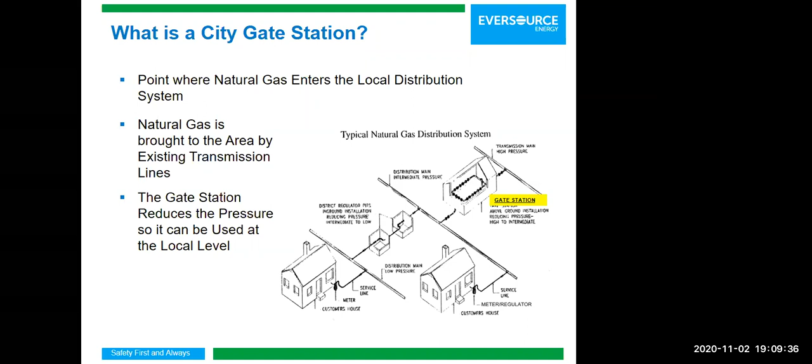If you paid attention closely, you would have heard me mention a distribution system. I'm happy to report that earlier this year, we got approval and support to install over 2.5 miles of 12-inch distribution pipeline from Main Street and Gilmore Drive to Douglas Road and Fletcher, just south of Meadow Pond, before the bridge.

I'm also happy to report that we've completed almost 50% of that project. Next slide, please.

Just to summarize, it is our intent to install a new city gate station, and we're also working on installing over 2.5 miles of 12-inch distribution main. So what values are these two major projects going to add to the area?

Number one, when we install the new city gate station, it improves the pressure in our distribution system. That way we are able to support the local customers in the area, which is a service we're always happy to continue providing. By completing this project, we are able to better serve our customers.

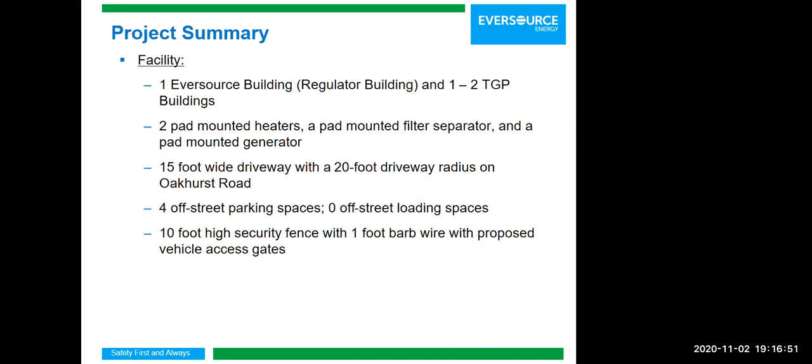There'll be a 15-foot wide access driveway with access off of Oakhurst Road. Inside the site, there'll be 4 off-street parking spots, and the perimeter of the site will be surrounded with a 10-foot tall security fence with 1 foot of barbed wire on top of that. Next slide, please.

This is our general arrangement plan for the site. You can see the driveway off of Oakhurst Road. The site is entirely contained within a 120-foot by 100-foot area. You can see on the plan also the setbacks, and the entire fenced-in area is within or outside of those setbacks: 20 feet on the east and west sides, and 50 feet on the front of the site.

On the eastern side of the site, there's a proposed property line that's now an existing property line. It's tough to see on the PowerPoint, but Eversource recently entered into a land swap deal with the parcel owners to the right for the solar project. I believe it was to accommodate some setback issues they were having. We adjusted the property line, and that's now an existing property line. We'll get that onto the plans as one of the changes, and we'll continue to number for that.

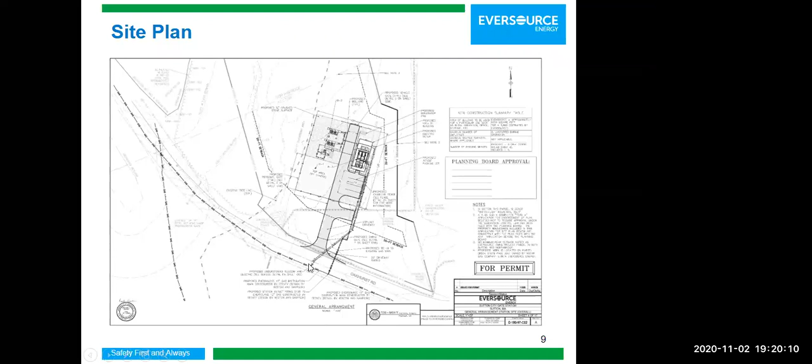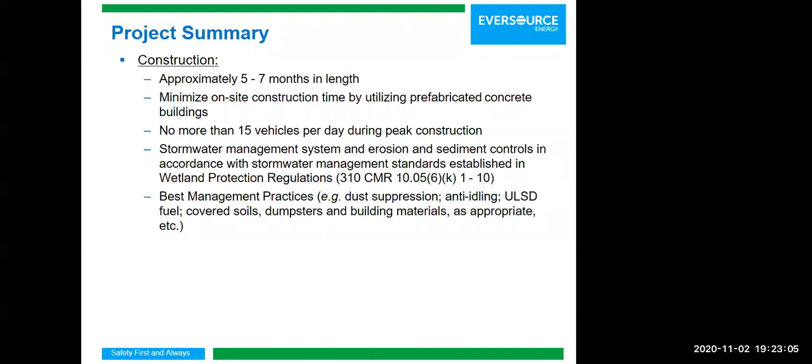The site will be unstaffed, only one vehicle trip per week for routine operation. As we discussed earlier, the exterior mounted lights at each door will be activated by switch or by photocell, something that was just recently clarified.

Essentially a photocell works by reading the outside light intensity, so it'll turn on at nighttime or at dusk and beyond throughout the night. That'll also have an override if Eversource elects to not have the light on. But the lights are very focused.

The photometric plan that we had done shows that at about 15 feet away, there's only one foot candle of intensity, which is similar to twilight hours.

The permanent stormwater management plan is based on a pre-treatment vegetated filter strip, along with an infiltration trench to take advantage of some of the well infiltrated soils that we have on the site. We also have a landscape plan for year-round screening of these.

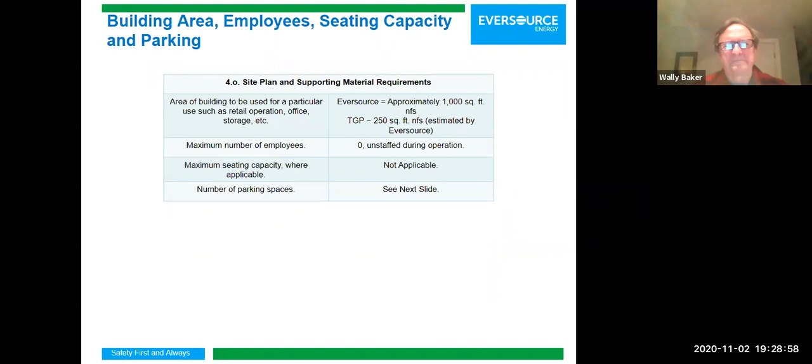Building area, employees, seating capacity, and parking. The area of the Eversource building, at about 48 by 21, is 1,000 square feet. Our best estimate right now is that the TGP buildings will take up about 250 square feet. As mentioned before, there are no employees.

It's unstaffed during operation. Seating capacity is not applicable. And we've proposed 4 parking spaces, which Tricia will address additionally in the next slide.

Okay, so as part of the site plan approval application, we've looked at the zoning bylaw and the tables there that specify the dimensions and requirements. There is 1 space per 1,000 square feet of net floor space.

We're proposing 4 spaces for parking. We're estimating about 1,000 square feet of net floor space for Eversource and about 250 square feet of net floor space for the TGP facility, which will be either in 1 building or 2 buildings as mentioned previously.

We are not proposing any off-street loading spaces, and we filed a waiver request on October 29th for no off-street loading spaces. We believe no off-street loading spaces are needed during operation because the facility will not receive regular deliveries of either equipment or materials. The off-street loading space would increase the impervious area unnecessarily, and it would not adversely impact the public interest or any natural resources.

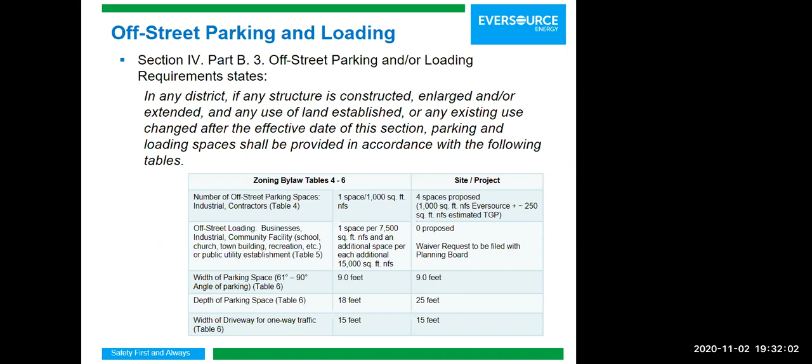So Jen, if you want to go to the next slide. I think I probably just covered this - this is again the request for the waiver to the off-street loading space that we just talked about. So you can jump to the next slide.

So we did do an assessment of the permits and approvals that would be required from the town. We are here today with you for the site plan review approval. We filed our application October 7th. We did file some response to comments from the planning director, Jennifer Hager, on October 29th, as well as the Board of Assessor comments, also filed October 29th. We are in receipt of Graves Engineering comments on the application, received those on October 29th, and we're still in the process of responding to those; we will provide written responses to the Graves Engineering comments.

We did file a wetlands notice of intent with the Conservation Commission. The first hearing was held on October 21st. That hearing is continued - the Conservation Commission is interested in seeing what the planning board's comments are on the project, so it's continued to their next regularly scheduled meeting, which I believe is this coming Wednesday. We will be filing a driveway permit application, a building permit application, and an application for a road opening permit as well. So that summarizes the applications filed or to be filed with the town.

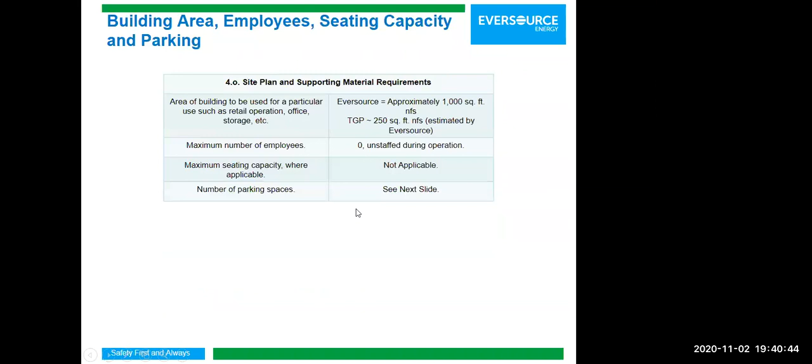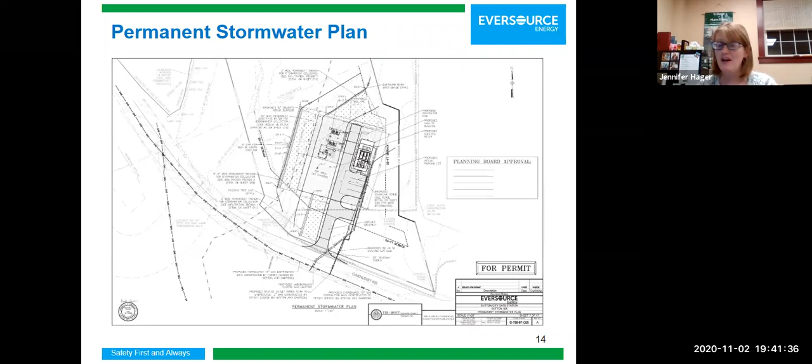So it's just cleaner and clearer now, you can see where that is. All right, great, so that's nice and clear. Can you talk about water supply, why you do or do not need water supply? Obviously, the district fire chief did not seem to have a concern with that. Maybe he just understands the nature of the natural gas installations in this facility a little bit more thoroughly. But if you could address that for anybody who might share those concerns.

Sure, I can take this one. Again, I don't know if we all heard during the presentation, it was mentioned that this is not a residential facility. It is not going to be occupied by anybody. Visits are only limited to once a week. So just like all the other facilities we have, we do not think any water supply is going to be required, again, because this is a gas facility. It's not going to be occupied by anybody. So we didn't think there was any need to have any water supply at this location.

Well, he commented in particular on hydrants, so I assume as an ex-member of the fire department, he's thinking about fire suppression.

Yeah, I can address that one also. Another thing that I guess we can bring up at this point is this facility, just like most of our modern facilities, is going to have a flame detection system and a gas detection system. These devices are highly sensitive, and they're going to be connected to a control room that we have in Southborough. In addition, these fire detectors and gas detectors are going to have a visible and audible alarm. So if for any reason there's a fire, which is never going to occur, we have a gas control room that is manned 24/7.

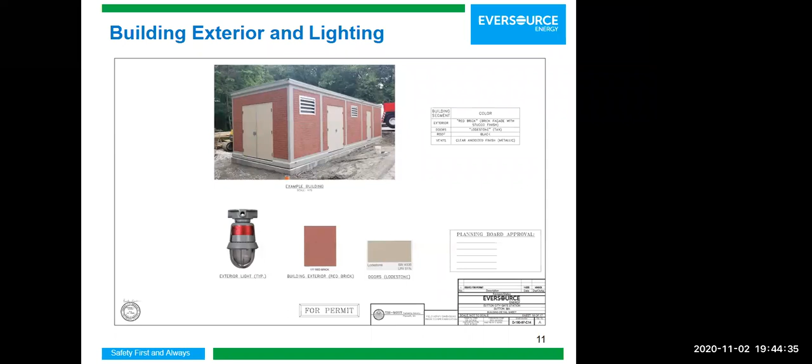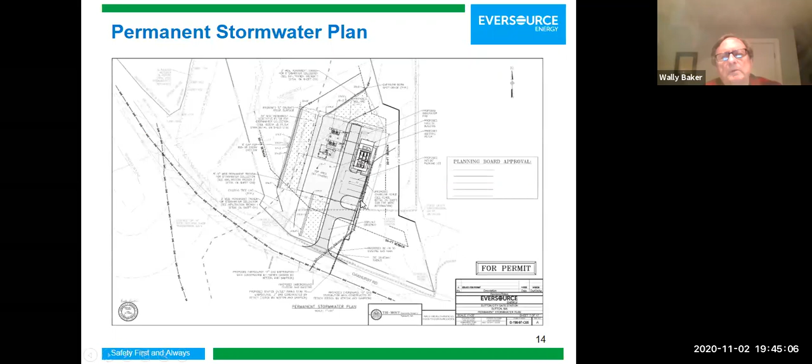And finally, if you go back to the site plan, on the east side of the property, you'll notice if you look closely we have a door on the east side of the building. So basically from that door to the main gate is a beeline. What I'm trying to say is that we have egress designed in a way that you can easily leave the facility. On the east fence line, we have a main gate that is a beeline from a door on the east side of that building.

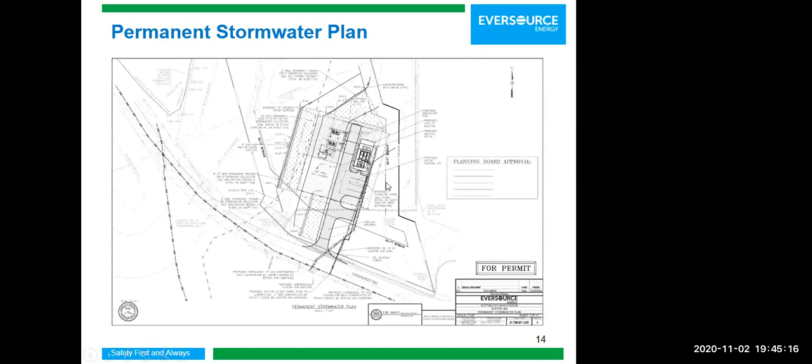So these are some of the considerations that we've included during the design, which again makes us feel confident that a fire suppression system will not be required, again because we have all these considerations built into our design.

I could also add one thing. I think that was good, but the emergency shutdown valves at the inlet to every building close at 180 degrees. So if there was a fire in the room, the gas would automatically close. Not that fires are very common, because all the wiring is intrinsically safe—there's no source of ignition. But given that, there's also no flammable material stored in there. So as far as extinguishing the fire, it's always the intent to isolate the gas.

Okay, and who was that talking now, Mark? Yeah, that was Mark. Okay.

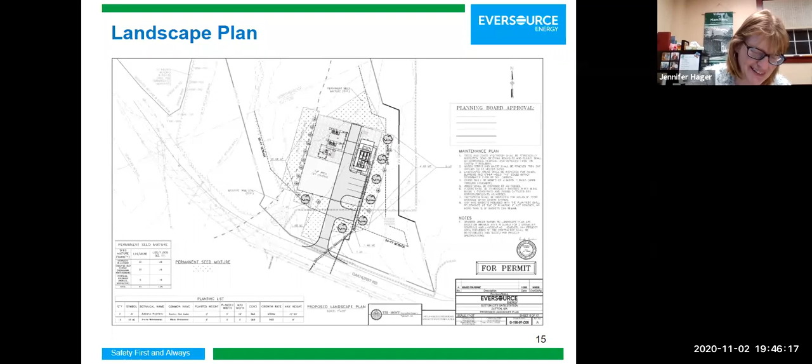Well, Mr. Lamb, I have a question relative to that. So these buildings don't have inert gas fire suppression systems in them? No, they don't, because the only thing flammable in them is the gas itself. So our plan in a fire is to isolate the gas, and that extinguishes the fire. Stop the source, okay.

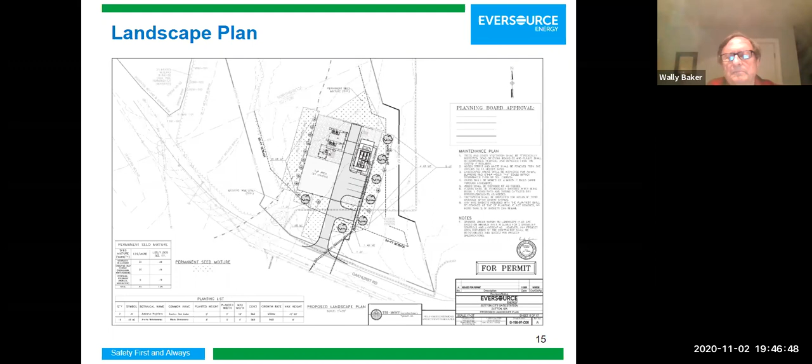Where are those emergency valves located? I can take that one. We have many of those valves in the building. If you look in the building, you're going to see them on each of the runs. In our building, we have 3 different piping runs, and on each of those runs we have multiple valves that we can operate remotely. But they're all enclosed inside the building. Yes, sir, that is correct.

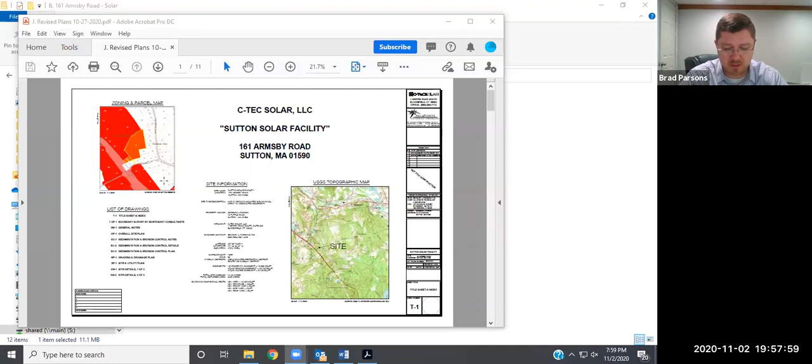One of the things we wanted to mention as part of this submittal, the property owner has acknowledged that his parcel here, parcel 18-61, where the solar facility will be located, pursuant to Massachusetts case law, is considered a merged lot with 229 Worcester Providence Turnpike, parcels 18-67 and 18-68, under the doctrine of merger.

Jen is highlighting those two lots. The larger of the two lots is where the solar photovoltaic will go, and the existing lot in the front has a current pre-existing non-conforming use of a one-family detached year-round dwelling.

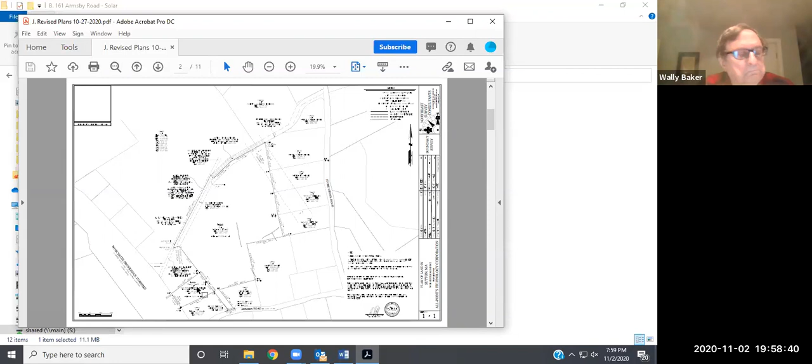So with that, before we get into the site plan stuff, I wanted to go over a couple of waiver requests. One request is that the applicant is requesting a waiver from the requirements of the Route 146 overlay district, as the project is not proposing a new building and is located on a rear lot that does not abut Route 146.

Additionally, we're also requesting a waiver for the requirement of a separate landscaping plan, as the proposed visual screening and seeding are shown on the current plan set with sufficient additional detail.

Lastly, as we'll discuss a little more in the presentation, while I don't believe this is a specific waiver request, the applicant is requesting that the work within the buffer be considered an upgrade by the board—that's the 100-foot buffer between existing zones, footnote 9 of the zoning table.

The existing site consists of tall pines without much underbrush, and the applicant is proposing to upgrade the area to improve the visual screening. The applicant is using the excavated material generated from the site to construct a berm or slope within the buffer to help improve visual screening of the solar panels.

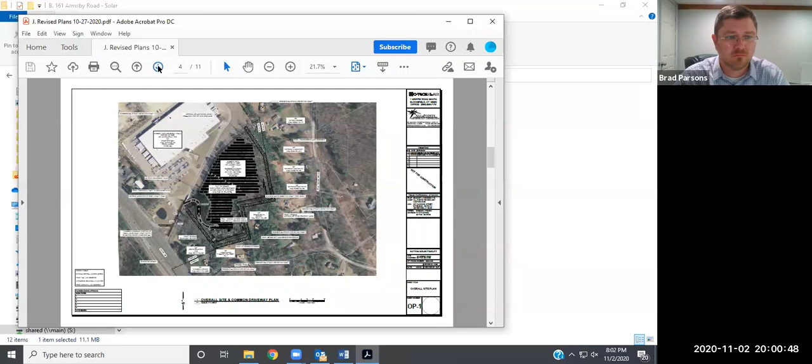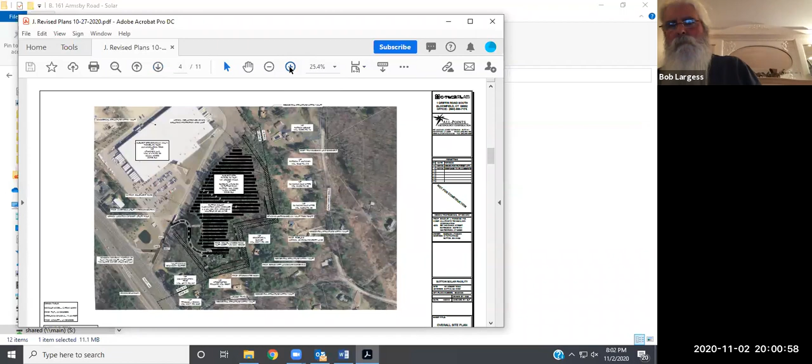Jen, is it possible for you to zoom in on that sheet just a little bit? Absolutely. Yeah, that's fine, thank you.

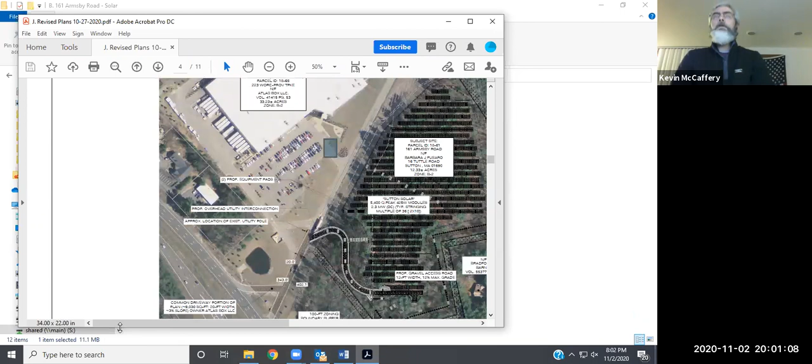So we'll just start right at the entrance. Part of the submittal was for a common driveway application. There was an existing easement in place with the Atlas Box facility to have a shared driveway on a portion of their entrance, shown on the sheet before this with just the boundary survey. That hatched area you see down by the entrance is the area we were proposing would be the common driveway, which would serve both Atlas Box and the solar field.

One of the questions we got back from Jen was why the common driveway, and that needs to have some justification, safety or for other reasons.

And there is an—Kevin, you're just a little hard to hear. I don't know if it's a speaker position or if you just need to speak up a little bit. Is this any better? I think a little bit. Okay.

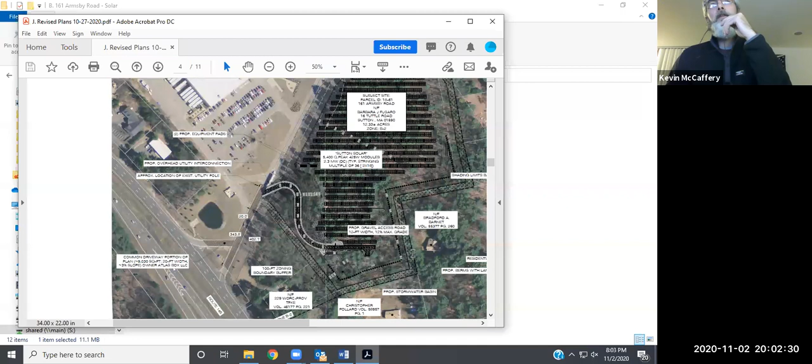Yeah, so as I said, one of Jen's comments was to justify the common driveway proposal. In our mind, it's safer to enter into that existing curb cut for Atlas. There is a driveway for the residential structure, but it's not going to handle construction traffic, the trucks that will need to get in there, and it's also not very safe to be turning directly off 146 into that narrow spot.

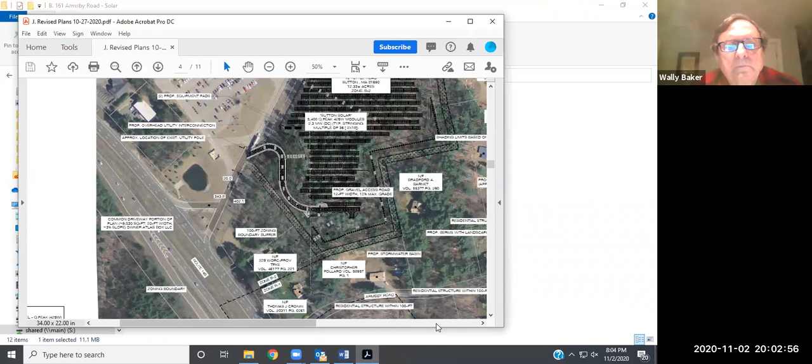Starting at the private driveway, right by that tractor trailer in the aerial, there's going to be a fairly steep and significant climb to get up into the site. There's almost 50 feet of elevation to get up into the field where the panels are proposed.

I talked with the fire chief and was looking for any design recommendations he had on a slope there, and he didn't really have anything in writing. At this point, we have that private driveway at 12%. It's got a short section right at the entrance that's less than 12%, around 3 to 5% for a little bit of a landing there.

You can see the proposed contours labeled there, east of that curve - that's all going to be a cut. So there's going to be a pretty significant amount of earthwork. Our strategy was to balance the earthwork on site - we didn't want to bring anything in or take anything out, aside from finished materials like the gravel road surface. That's where most of the material for the berms is going to originate.

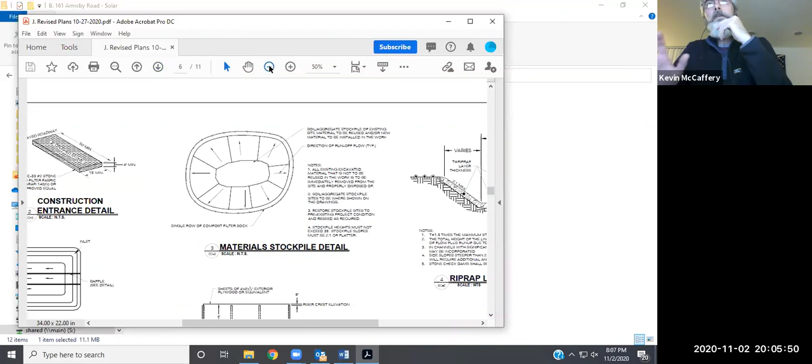So we can talk about stormwater for a minute. The site has very good soils - with the NRCS rating, it's the most highly infiltrative of their classifications. It's real sandy, so a very limited amount of formal stormwater is needed for the final site, after everything's stabilized.

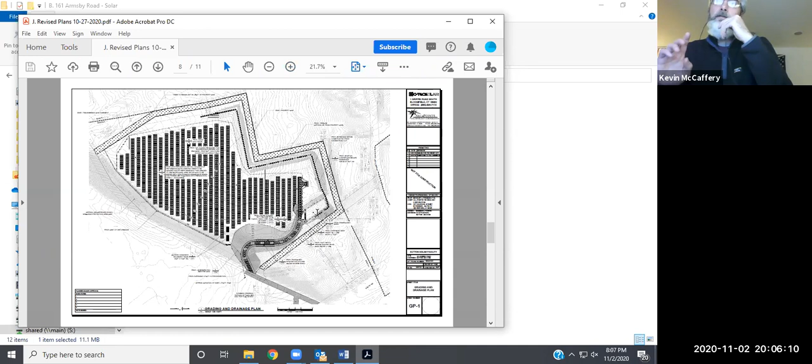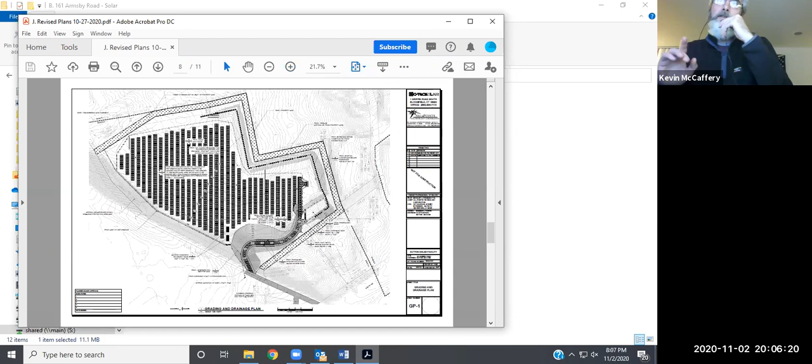We have one infiltration basin shown at the south end, which is pretty shallow - less than 2 feet. Then along that access road, we're calling for rock lined swales on each side that would not have fines in the material, which will provide additional infiltration.

The idea would be that there's no surface outflow to the common driveway or to the street, and everything stays on site and is equal to or less than what happens on site now.

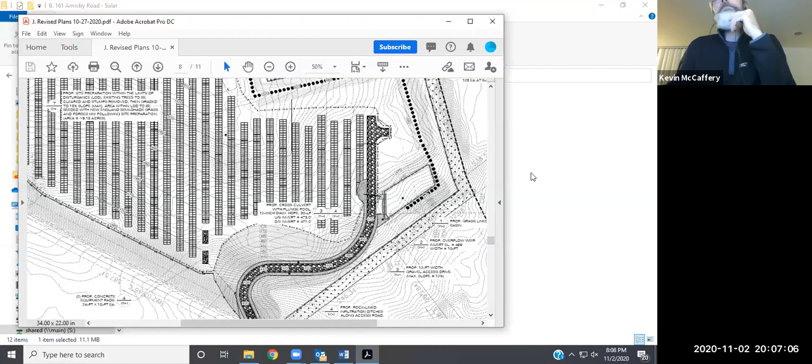So you can leave it right there, Jen. That's fine. I wanted to talk about the perimeter of the site a little bit, and these berms and the landscape screening.

We have abutters on most of the south and east sides, and there's residential structures mixed through those parcels. Our approach was to set these berms along those areas where we might have a concern for visibility, and we also set the juniper landscaping along the crest of that.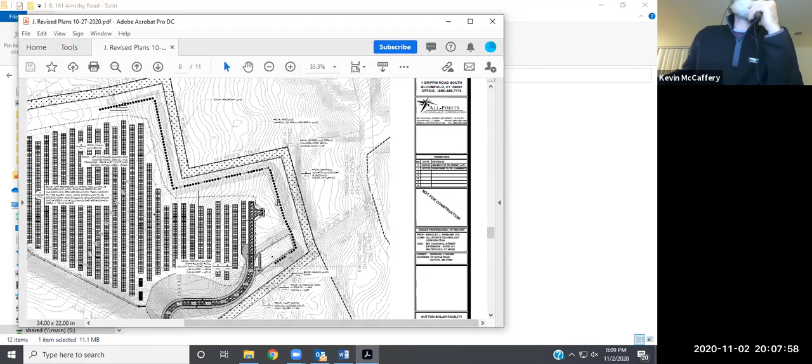At this time, we're calling for those to be about 3 to 4 feet at install. Once those take hold, they reportedly grow about a foot a year. So we're going to run that berm and screening all along the south side, all along the southeast corners, and as the topography starts to top out on that eastern side.

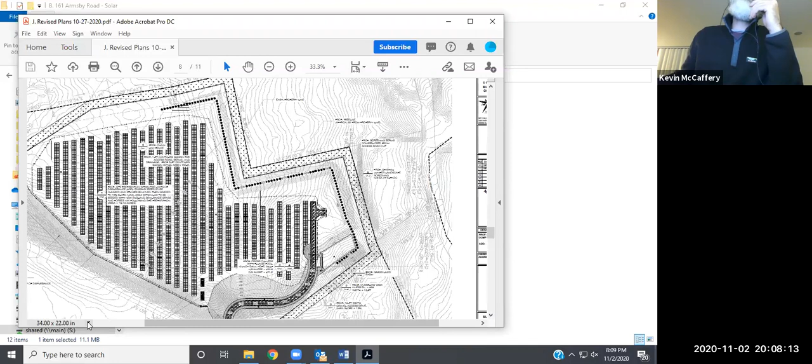The other thing we are proposing for visual screening is that eastern fence, pretty much that whole straightaway on the east side - we're proposing to have vinyl privacy slats to limit visibility.

That stippled hatch you see around the perimeter is a 25-foot width of no clearing, so the existing woods will be left in place there. The thinking is that this other screening we're doing would prevent being able to see through the understory of those larger trees - they are pretty tall, in the 75 to 100-foot range, most of them.

I guess that's the summary. Like I said, pretty limited stormwater. There is one cross culvert on the access road towards the south end that goes into that infiltration basin.

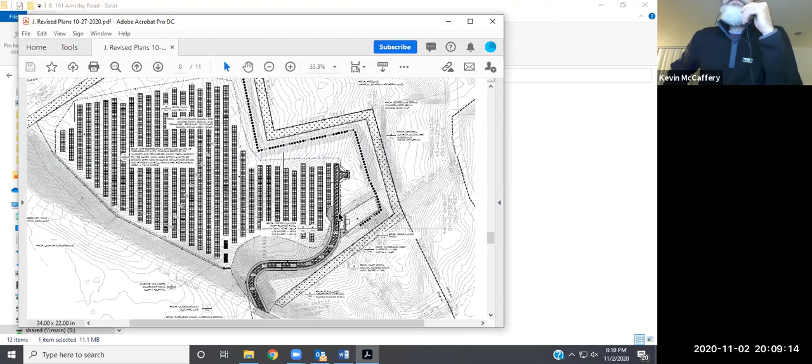Graves - we did receive Graves' comments last week. We haven't had a chance to address those formally on the drawings, but we did go through those. One of the comments had to do with construction laydown, construction parking, and those types of things. We think there's plenty of area at the south end by the Hammerhead turnaround between the access road and the infiltration basin - we're going to get some room in there, and also off to that southeast corner.

They also were looking for a longer stub on that turnaround, which is fine - we've got room to do that.

Jen, you sent us a list of comments. I'm going to just run through those real quick just to make sure I touched on that stuff.

Just to make it perfectly clear to everyone, if you're not already aware, we are on the zoning boundary between residential and the new zone, and that's why we're not entering through that small arm that touches Armsby Road, because that's in the residential zone.

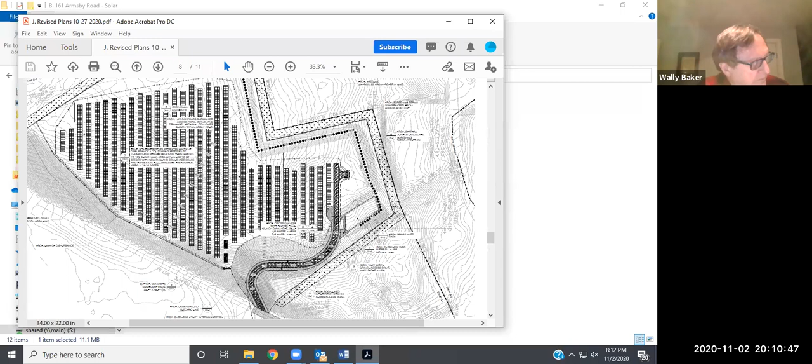So the panel, you had asked about the height of the racking of panels. I'd say in general, they're going to be about 3 feet above grade on the low side and around 8 feet on the upper end. And the system they're proposing here is a 20-degree tilt.

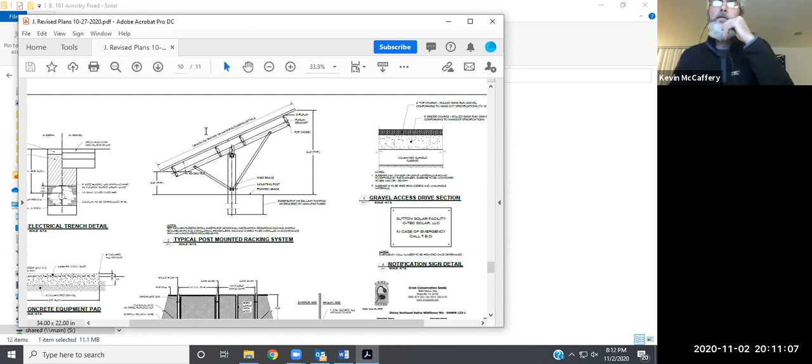The total generation capacity is proposed at 2.3 megawatts, and that's DC. 5,400 solar modules to get that output.

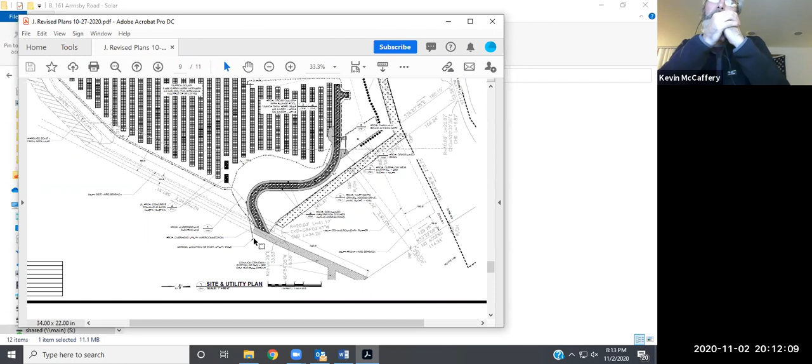Jen, you had asked about the overhead utility line. So all the electric lines will be underground throughout the site, except right down at the entrance. There'll be a short run that goes overhead and connects into that existing utility pole. That's standard practice with these solar fields—everything's underground until it comes near the interconnection, and then it goes above ground. A large part of that is to deal with the utility and their access to it, and all the metering and switchgear that's going to be needed for both the utility and the applicant. So in our response to you, Jen, we said that would be elevated far enough above the common driveway, so it's not going to interfere with their truck traffic.

So yeah, Brad touched on the waivers, touched on the landscape plan. And we saw your comment about decommissioning, and that's fine, we can work on that. As we said in the letter, we request that be a condition of approval, but we can get started on that and then start working through that process with you.

So I think I'll leave it at that as far as an overview, but we're obviously happy to talk through the details and answer any questions you have.

Is there anybody else that's part of this presentation? I'll just ask if Jeff Pipling or John had anything to offer or clarify.

Yeah, this is Jeff Pipling. No, we're all set at this point. Thanks, Brad. Okay.

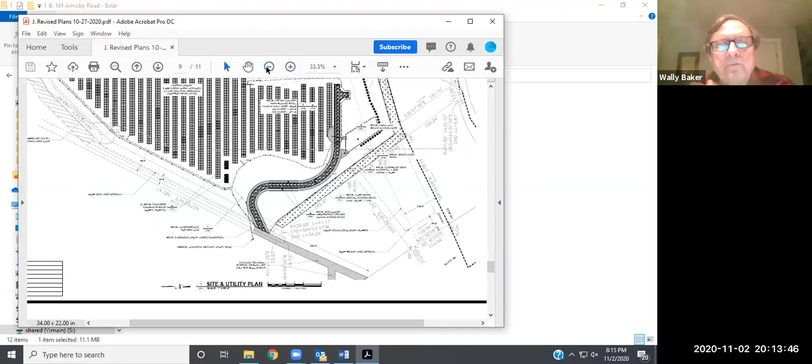Do any of the board members have any comments? Hearing none, is there anybody out there in the public that is tuned into this for this particular case? Okay.

I have a question though, just for my knowledge. What's the acreage on this site? It is 12.33 acres.

And it seems like the elevation, this is going to be from a road from the 146. You're not really going to see this because it's up above grade by 40 or 50 feet. That's correct. You may catch a slight glimpse of it heading southbound on 146, but based on the screening that's currently there and the opening width of Atlas Box's driveway area, it's going to be a slight view there.

Yeah, I had that same concern as you come south on 146. You do have some vegetation here, and a little bit back over here with Atlas Box, but this is all being stripped right here, right? And then through here. That's correct.

All right, the other issue, unfortunately, too, is from a screening standpoint on that side, we actually have the topography kind of working against us, in a sense that pretty much half the site drains to that northwest, which is actually south on the page towards the former Atlas Box parcel, now unified. So everything kind of drains that way. Our solar kind of sits up, even though we'll do the privacy slats along that, and we can even do it along the unified side if required. I just don't know if, due to the topography, it's going to screen as much as we would potentially like there.

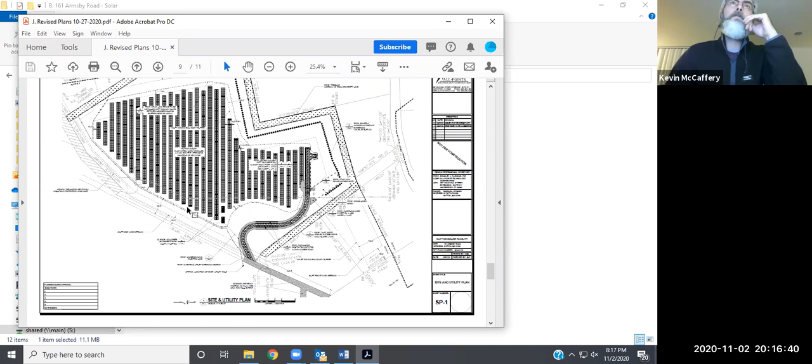Yeah, I was just thinking, these aren't really designed to reflect light. I was just thinking, how visible is this chain link fence, and will it catch light and create any distraction? Should that be black vinyl coated? That was my only thing, how much will this be exposed, and will the fencing catch or reflect light and create any kind of visual issue.

And that could just be a condition that, once it's in, you can't really fix it. So I don't know, maybe. I would say I don't think we have an issue with that being black vinyl. Then it would eliminate that it would reflect.

Agreed. And the other thing, I think the panels, when you're looking at those from that angle, obviously they'll be facing a little more south, so you're really not going to be looking right at the panels either.

So, if you do a last round of plan revisions when you do Jeff Walsh's, if there's any required for Jeff, just show what sections of fence would be black vinyl and which ones would have slats as well. Okay.

Wally, through the chair, I just have a question for Jen if I could. Go right ahead. I was just wondering, Jen, if you've heard anything updated on Atlas Box, being the property right next to it, with the easement. Have they responded in any way? Any problems with it or anything from them?

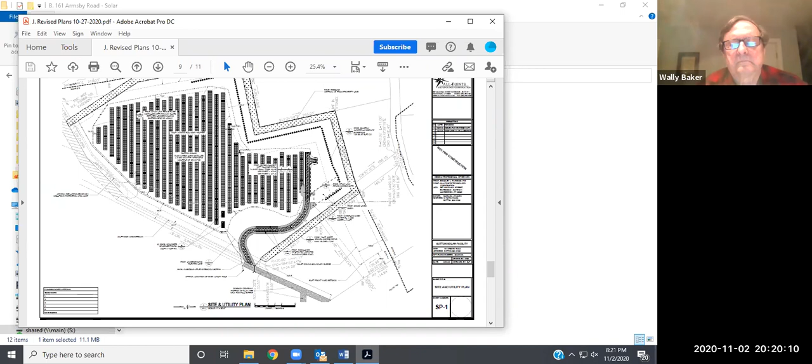But I did reach out to Atlas Box again today. Again, they said they're just reviewing the drainage, taking a quick look at the plans. They did not express any specific concerns about anything. So I'll reach back out to them again tomorrow and try to make sure we clean that issue up. And I'm sure Mr. Fusaro will be doing the same.

Jen, if I may, this is John Altamari. I represent the Fusaros.

So, we do have an easement agreement that was dated back in 2008, which gives us the right to use the driveway and to make curb cuts off of the driveway, and to use their drainage systems. And there are some limitations there. When I was talking to Attorney Dawson, who represents Atlas Box, he indicated that their main concern was what the ramification of this project would be on the drainage.

He wanted to know whether or not we're tying into the drainage, which we are not. He wanted a letter from our engineer stating that we weren't tying into the drainage, which I'm sure we're going to get to him. And we were also talking about what kind of traffic there was going to be associated with the project. My conversations with him, I think he was happy that there's going to be little to no traffic for the operations, obviously because of the nature of the project.

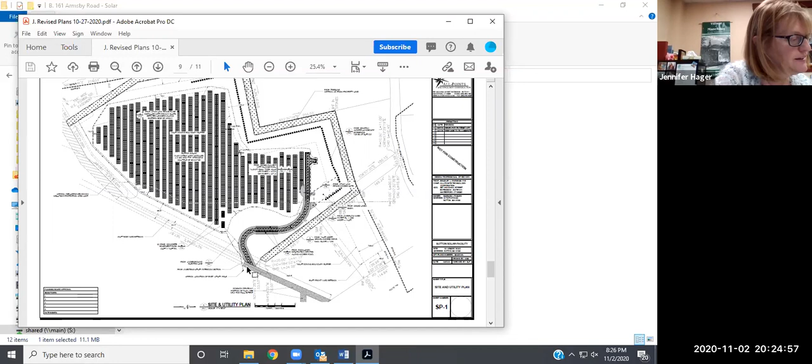Yeah Wally, should we, I'm assuming, and I hope Atlas would send a letter to move the project forward, but it all kind of hinges on that. Anything else we do will follow afterwards. Are we putting things backwards, doing waiver requests if we don't have a way to get onto the property? I'm assuming everything's gonna go smooth and quickly, everything that I'm hearing from all the parties that talked here tonight. And I can't imagine why Atlas Box wouldn't be looking at this closely, and they've had the right to use this common drive over all these years. So it's time to be a good neighbor and move this forward.

Well, frankly, I would feel better if we did have a signature here, confirming this whole thing. So maybe we should just continue this, and then at that point, because if we don't get a signature, then maybe some of this whole project is moot. Just continue it, and then we can address the waiver issues at that point in time. What do you think of that, Bob? I agree with that. Okay.

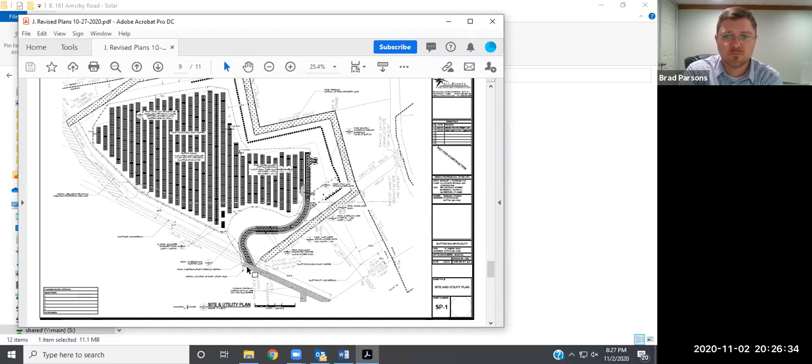And I think it looks like a good use of the property. It's clearly, it has all merit, and it's a good use of the property. It's not going to be building a school or anything like that, we don't need school buses. So it's a good use of the property. I'd like to see it move forward.

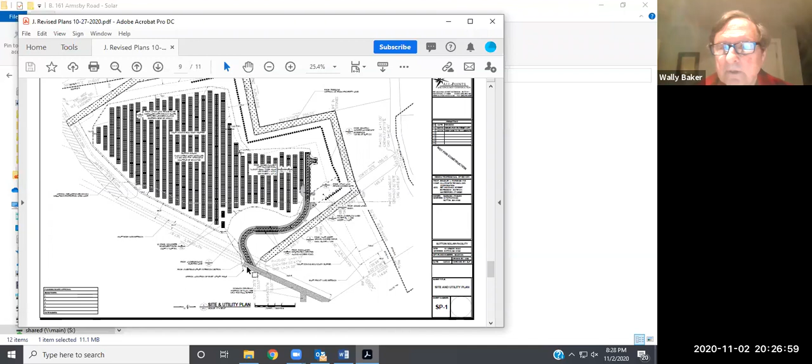Mr. Chair, this is John Altamari. If I could just jump in for a quick moment. So, not that we're anticipating an issue, but I don't think we actually need the signature of Atlas Box, because we have rights to the property. We have rights in the road. They can't deny that we have a right to use the driveway, to have a curb cut off the driveway, which is not on their property but on our property as well. We have rights to lay utilities, rights to the drainage, etc.

So there is a vested interest in the land, which is recorded, which I think gives us the ability to go forward with or without their signature. Obviously we want their signature rather than not have it. Obviously we want to be a good neighbor, and we're giving them the opportunity to look at this, and if they have any objections, to work with us with respect to those objections and get by them. But I don't think it's a project that they can hold us up on because of their failure to execute the driveway easement. Hopefully we don't have to go down that road, but the easement, I think, is in front of you now, and if you examine that, or give it to your counsel to examine, he's going to tell you exactly what I just told you. Okay.

Jen, I'm not a lawyer, so I'm not equipped to get into this kind of detailed conversation. Yeah, I guess what we can do is hope everything resolves shortly, and if not, the applicant would need to agree to pay to have town counsel take a look and make sure they're comfortable, as legal advisor to the board, with the board proceeding with just the easement in place and not a signature.

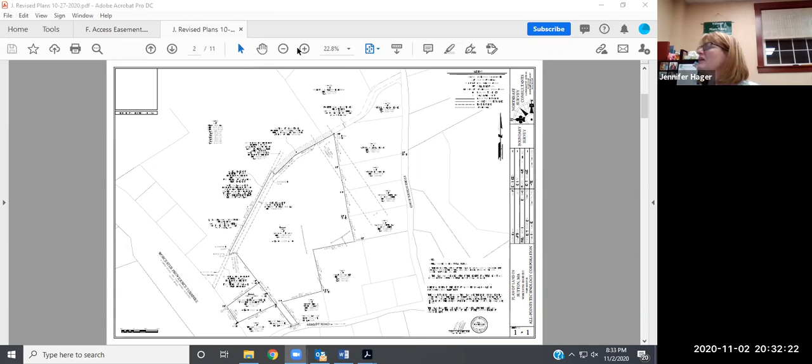Are we going to be able to see any of this? Let's see where they are, yeah. Let me pull you up here. Sorry, I'm just sharing the screen so we can see where you are. There we go. All right, Shannon, where are you located?

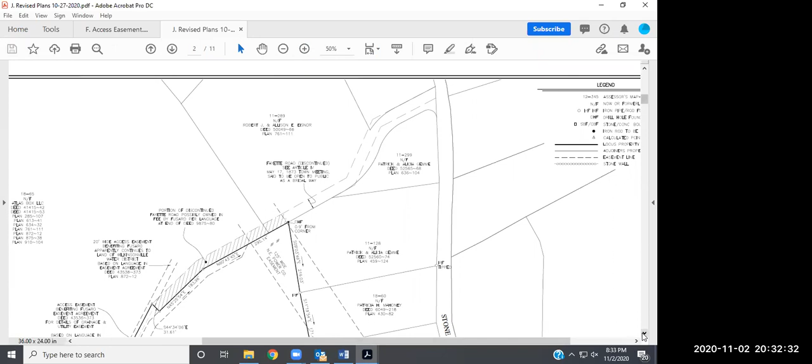94 Stone School Road. I don't see you. Let me just try another one here - 94 Stone School.

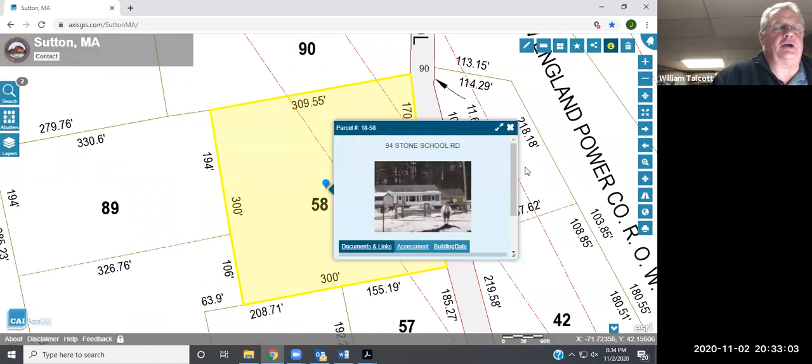While you're looking for that, Jen, how does the decommissioning work? Is there a bond that gets posted on that? Yeah, a bond gets posted. Okay.

Through the chair, is there any sound associated with these projects? This is Brad Parsons with All Points, I can answer that question. After construction is completed, the only noise associated with this facility is the inverters and transformers. The inverters emit around 60 decibels at 3 meters, or 9 feet, and that sound dissipates over that length. The inverters will be located closer to the Atlas box parcel, right where Jen is showing there. Just to give an idea, 60 decibels is equivalent to a refrigerator running.

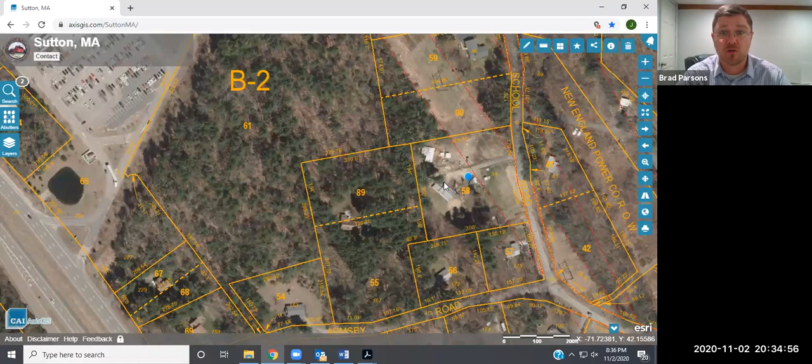Oh, okay, and that's all located by the Atlas box? Yes, correct. Okay, and I believe, Jen, we had presented to the board about 2 years ago now, where we presented very informally at that time. We did prepare some site graphics that Kevin sent over to you via email, and we can actually show the sight lines from that parcel - we have a sight line done from that parcel. Okay, let me try to find it here. Those came from Kevin. There you go.

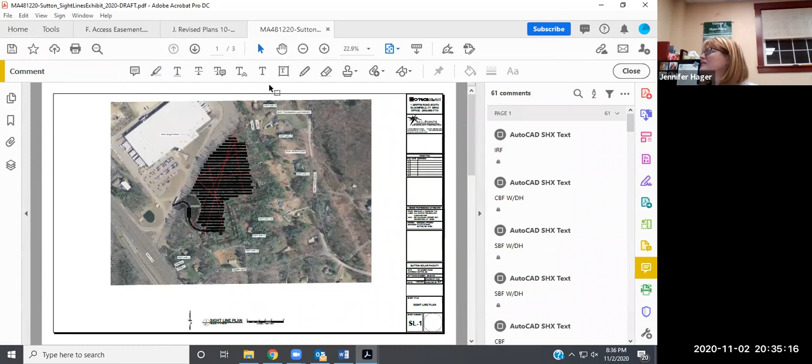Kevin, I don't know if you want to talk through this. It's up to you, either you or me, Brad. I don't think we have one exactly from the caller's residence, but we have one just to the west of there.

So these red lines are the sight lines. Yes, correct. This is the person calling in right here, and this is the Grondin's house at 94 Stone School. Probably the 3A is actually the best because those houses sit around the same topography level.

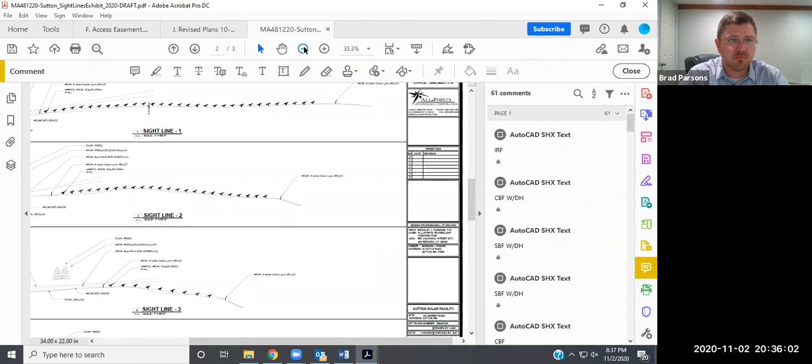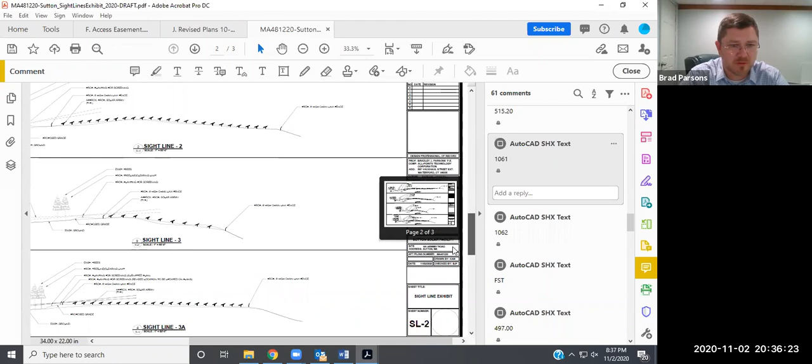Okay, let's go down. If you go to the second page, it should show these sight lines, and they actually show the proposed earthwork as well. Right at the bottom of that last page there. Sorry, it's not being nice to me. There's 3, right at the bottom, so there you go.

So you're saying this represents about this elevation of the house? Correct. You can see as you're able to zoom in there, and I know it's probably going to go off kilter a minute. That's okay, I'll find it.

One thing we did notice as we were setting these sight lines, we had the proposed screening planting a little closer to the property line. So we were actually going to take the plantings and shift those back closer to the fence line there. That's the new proposed location, much closer to the fence.

As you can see, that plant is shown at a 5-foot elevation level, and those grow to a maximum of 15 feet in height. As Kevin mentioned earlier, they grow about 1 foot a year. They're basically a dwarf evergreen, so they allow for screening but don't compromise the solar facility with regards to shading.

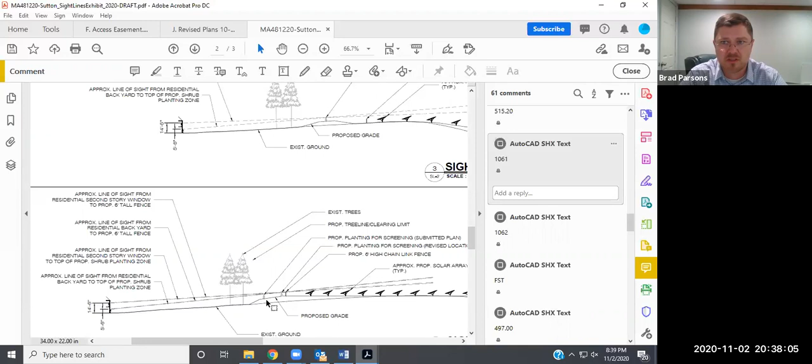You can see from both the first floor and second floor, with the change in earthwork and building that berm and slope up, we're forcing the sight line from the residents up and over the solar facility. So maybe during the first year they might catch the top of a panel or two, but after year 2 or 3, with those evergreens filling in, that should pretty much fully screen the facility from the residents.

Thank you. No problem, Shannon, I'm happy to send you this material. If you want to reach out to my office tomorrow at 865-8729, or just email me through the town's website, I will send this information over to you. And if you think anything's missing, just let me know. Great, thank you very much.

Is there anyone else out there in the general public that wants to comment on this?

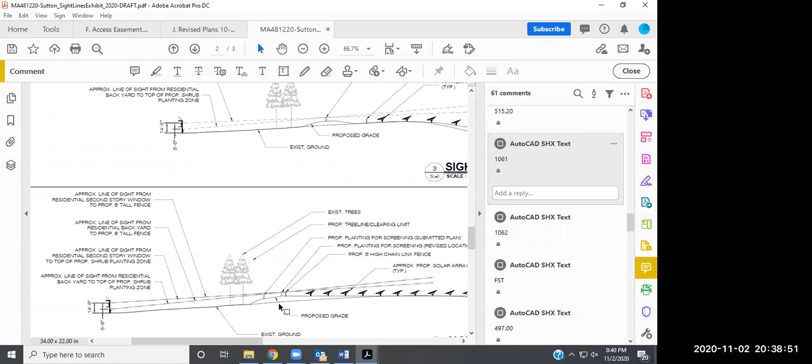If you can hear me, I'd like to say something. Go to page 6 of the Atlas Box Agreement. What is your name, sir? My name is Julio Fazaro. I'm Barbara Fazaro, the property owner's husband. Oh, okay, thank you.

I believe that's page 6 right there. Page 6, I can't get, but is there a signature on that page? Is that the signature page? Oh no, this is 7. That's Art Mahassel's signature. There it is, right there, correct? And my wife's as well? Yep, okay, I just wanted to point that out.

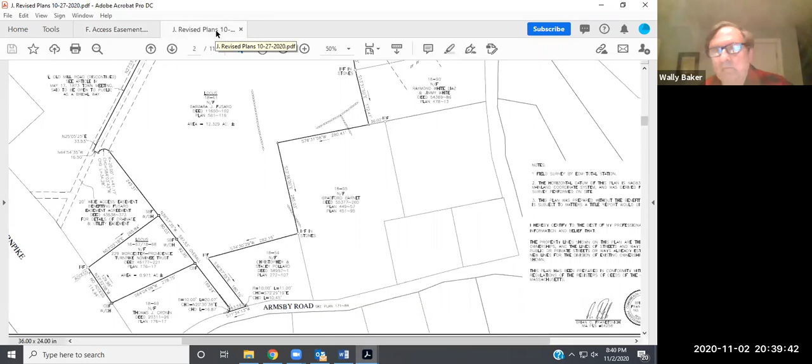All righty, okay. So what are the other, we haven't talked about what the other town area departments thought about. There are no taxes owed on this for map 1860, parcel 61, and the fire department wants a Knox box or Knox padlock required at the gate for emergency access to the site. Those are the two comments we got from the other departments.

So how many more waivers do we have, Jen? We had landscaping, they just did not provide a separate landscape plan. They obviously do show landscaping on the plan. The bylaw had some language about showing what the existing cover is, specifying what that is, which I don't think was necessarily specified on the existing plan. You can kind of see it in the aerials, a mix of deciduous and pines.

That was not specified on the plans, but they do have a landscaping plan, as was noted, that shows Spartan junipers, which are fast growing. I made a comment by email after I got the revised plans that Spartan junipers only grow to a width of about 3 to 5 feet. So the current proposal of 8 foot on center needs to be reduced. They recommend for solid screening no more than 2.5 feet, which is a little tight, but in no case should they be planted more than 5 feet on center, if not a bit closer to achieve that full screening intended.

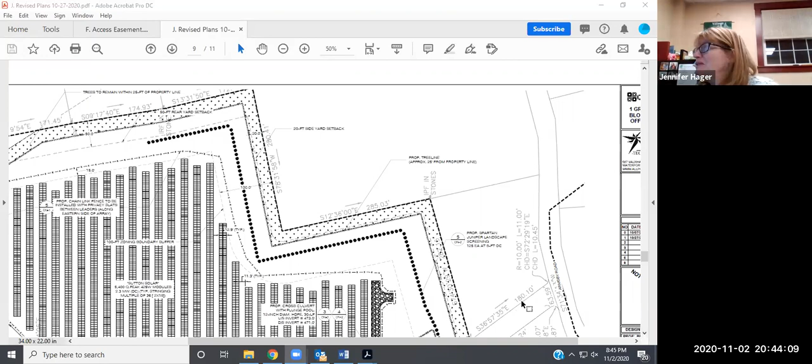So there's a number of questions. The first is what portion of this project the board considers to be the principal use. Is it just the panels? Is it the panels and the fencing? Is it the panels, fencing, and screening? Or is it the panels, fencing, screening, access drive, and the shade clearing area required to keep shade off the panels? What portion of what you see here does the board consider to be the principal use? That's the first question.

And then we can look at the bylaw required setbacks and the zoning district required setbacks, and then briefly just discuss open space. So, thoughts on principal use?

I would think that would be just the actual units themselves. Okay, well, largest, I would consider the solar panels. That's what I'm considering. Scott Paul, I would agree. Mike Gagan, I would agree as well. Wally Baker, I would agree.

All right, so as you can see here, they've drawn a box around just the solar panels. And it looks like, Brad, if I'm reading that correctly, at all points you have 100-foot separation from the zoning district line to the panels. That is correct. Good.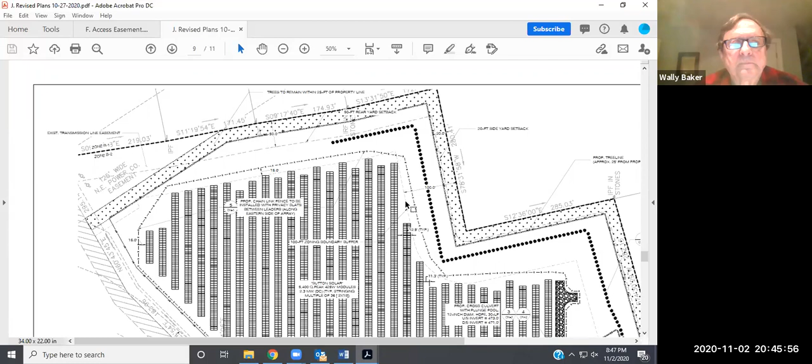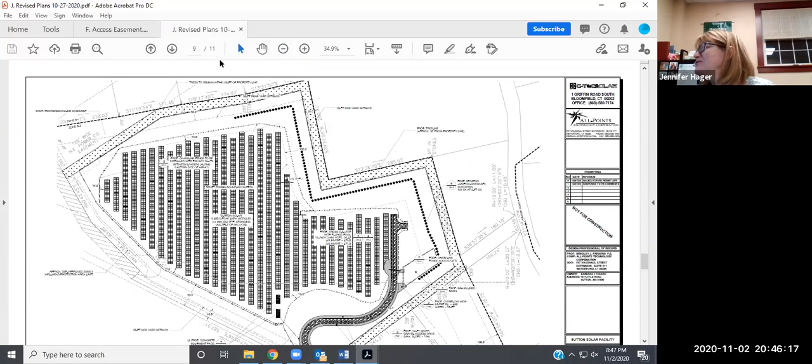Now your zoning district setback is, what is that? 50, 20, 50. Technically for the LG SPI, we're at 100, 50, 50. There you go. And 100 was front. Correct, which front is technically here. So you're well over that. And what were the other ones, Brad? 50 and 50.

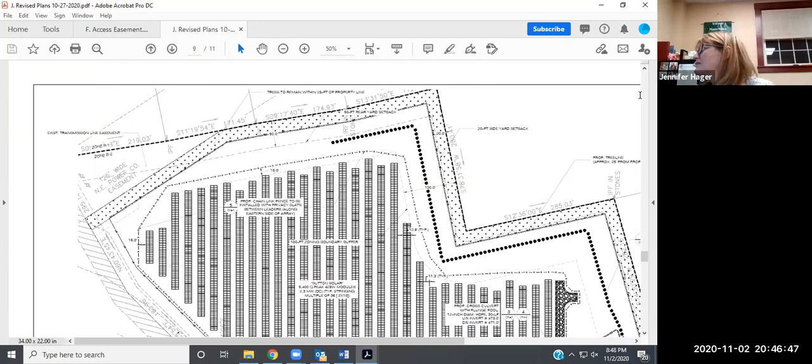So are any of the panels within 50 feet of lot lines, including over here? I don't believe so. I want to say, if you zoom in, is that a 50-foot offset right there? Sorry, that on those plans? Stuff in my way here. It's actually to the fence - it's 66 feet to the fence line there. Awesome. All right, so you meet the setbacks in terms of the zoning district.

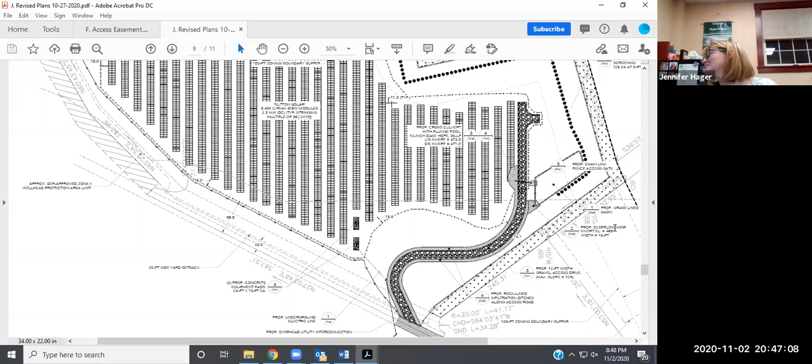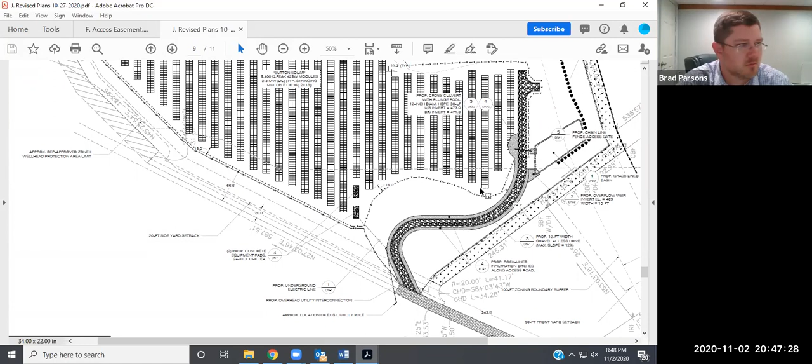Again, even from this lot line, what do you have, 25? Yeah, we got the 25 screening. We're about 74 feet to the fence. And about what to the roadway? Maybe 25, 30. Probably about 30, 35 feet. Okay, so you meet the zoning district setbacks. Now just talk to me about open space, because I think we're required to do open space of what? B2, 25%?

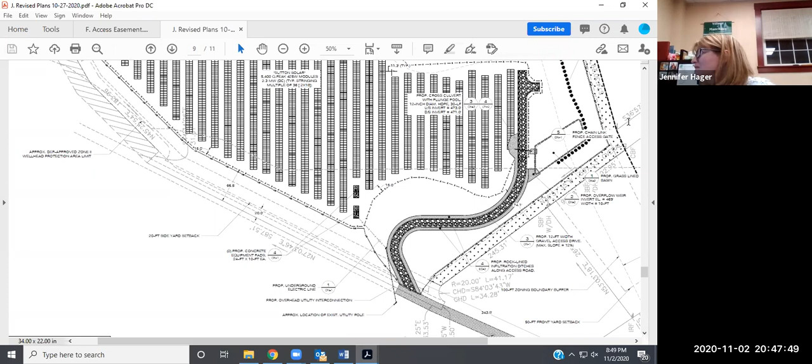That's where I've always struggled with solar, as far as open space goes. Technically there's grass growth underneath all of the panels. Our intent is to plant this with a native wildflower mix, so it won't just be standard residential grass - it'll be a lower growth wildflower mix, and it will grow under the panels.

We could look at what that percentage is overall on the lot, but counting that 100-foot buffer around there, we're probably over that 25%. I can do a quick calc. So the board doesn't even need to get into whether they consider a fenced solar panel field open space - if you can meet the 25% outside of that, that's a lot cleaner. Let me see what we can do right now.

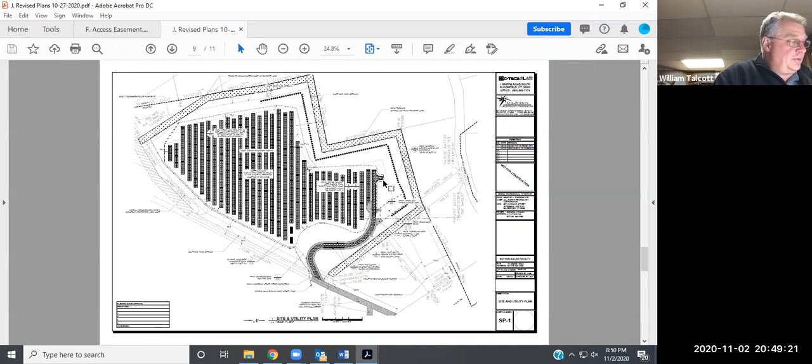Does the board have any thoughts on whether they consider a fenced solar panel field open space? I wouldn't consider solar panels open space, whether there's flowers or rocks. You consider it open space? Would not. I concur with that. Same here.

So you need to make sure that you meet that open space percentage - getting that for everybody right now. I wasn't going to put you on the spot like that, Brad. Oh, that's what they make the measuring tool in the PDF for.

I don't think we had anything else other than that, right? While you're measuring, I'll just read real quick - title page. We had that piece about the decommissioning being part of it. You can do that, and you have done that as a condition in all of your past solar projects. I just wanted to make sure that was on the record, that they need to come up with a decommissioning estimate that our engineer agrees with, then we need to put that agreement in place before they're allowed to pull a building permit.

Jen, we can show the exact figure on the revised plans, but we will have the 25% - it's going to be 3.08 acres on the 12.33, and we'll get the actual measurement on there outside the fence line showing that we meet that. All right, cool, great, thank you.

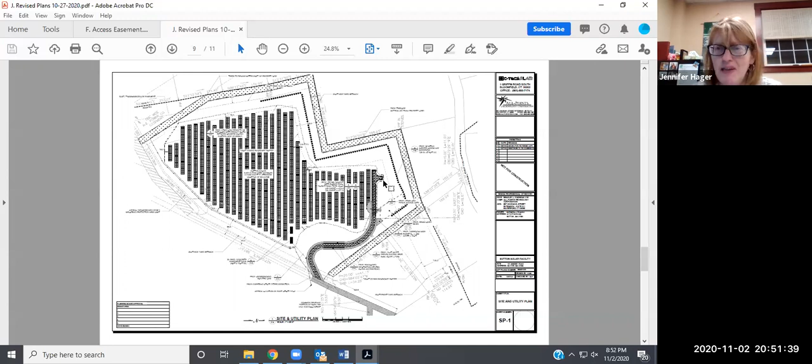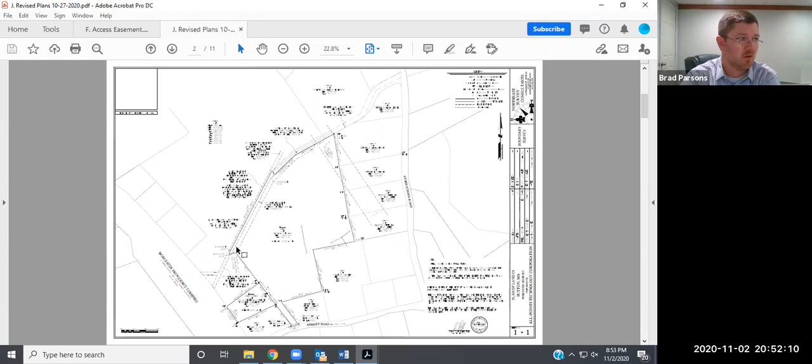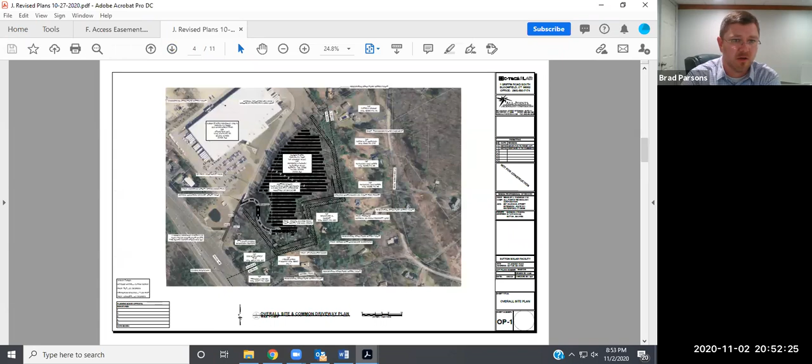I don't have anything else. Can you just tell me, is the utility connection inside an easement area as well, or does it not need to be because it's in the air? So it will be within the easement, and that easement does allow for utility connections. Obviously, we still need to finalize that with National Grid - we are going through the full interconnection process right now. But so the board knows, there are overhead utility lines on 146 that the trucks going into the former Atlas Box Unified Packing cross underneath, and there's a utility line on the northwest side of that driveway, overhead 3-phase utility that we'll be tying into.

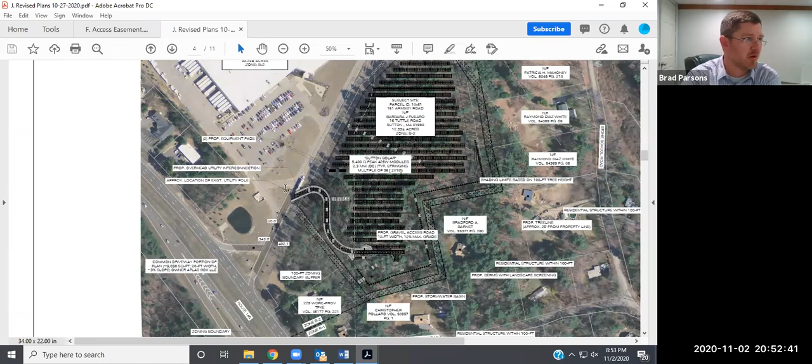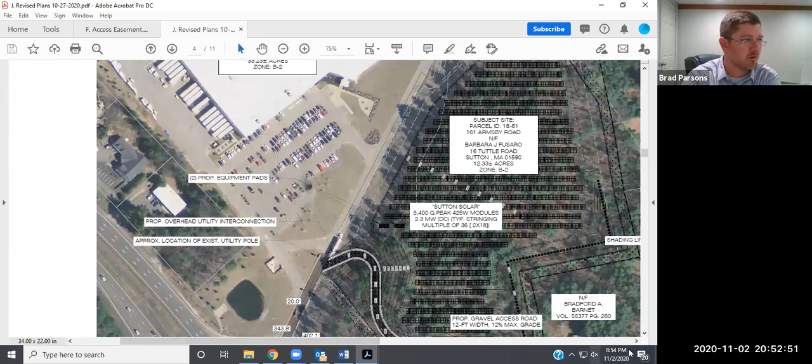So we just need to understand where National Grid's going to end up placing their equipment. They've got a bunch of poles coming into the site that we're hoping they'll be able to use those poles to place all their equipment on as well. So that utility pole's kind of right on the edge of the easement - is that what you're saying, right in here? Yeah, correct.